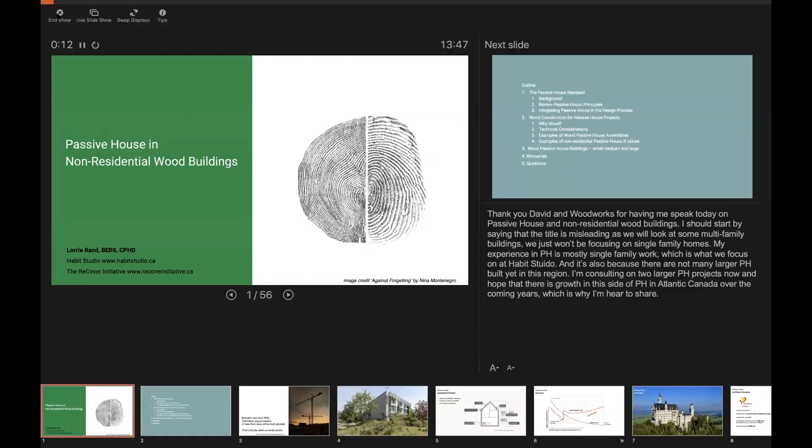Okay, so now I'll just go presenter view. And then I can see your presenter view here, not the... Oh okay, that's good we're practicing. That's so strange. Okay, so stop sharing.

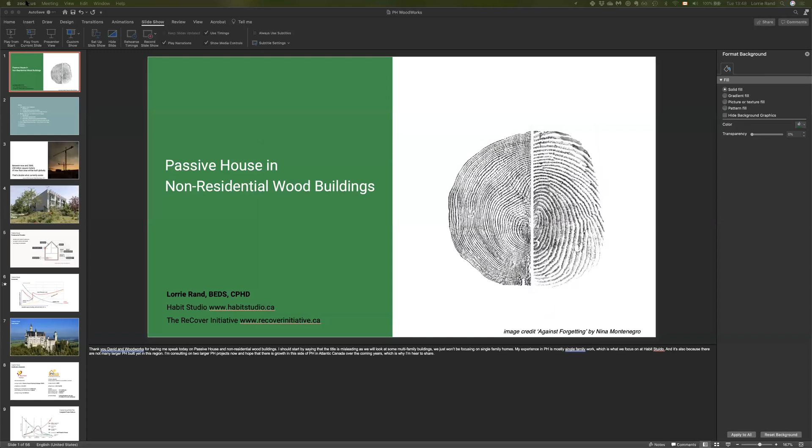There you go. Okay, not sure what that was. Must have hit the wrong thing. All right, yeah, that's perfect.

Great, now I have to confess I didn't practice the time, so there may be a part in the middle where I speed up a little. Ah, that's fine.

It's so hard, so much to cover. Well, there is a lot to cover. Like I was saying to my drafter this morning, it could easily be an all day thing.

Not that I would be prepared for that, but we'll just, if you go longer, cut the Q&A out. Sometimes there's no questions at the end, sometimes there is. It's hit or miss, really hard to prep for that.

Excuse me, bless you.

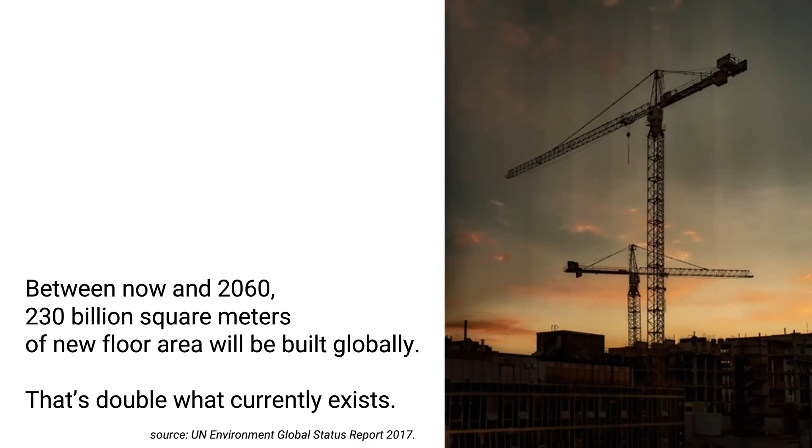I think it's our responsibility to make every building that we touch for the rest of our careers as sustainable as possible. That's where Passive House comes in, because Passive House buildings use up to 90% less energy than code compliant buildings. But while efficiency is what Passive House is predominantly known for, the Passive House standard is first and foremost a quality standard, and it promises unparalleled occupant comfort and minimal costs of building ownership over the life of the building, as well as the highest levels of energy efficiency achievable.

This is a picture of the first Passive House. Passive House started in the late 1980s when Wolfgang Feist, a German physicist, and Bo Adamson, a Swedish economist, set out to use building science and economics together to design the best building they could build. This project was built in 1991 and has been continuously monitored since then. A report was recently produced documenting 25 years of monitoring data, demonstrating that the house is still performing as modeled. I called it a house, but it's actually a 4-unit townhouse in Darmstadt, Germany.

In terms of energy use, the condition of the building components, the indoor air quality, and general quality of interior spaces, this building is still going strong with no noticeable deterioration in performance. So that can give us confidence. A lot of people in North America still haven't even heard of Passive House, but there's 25 years of proof that as an approach, it works.

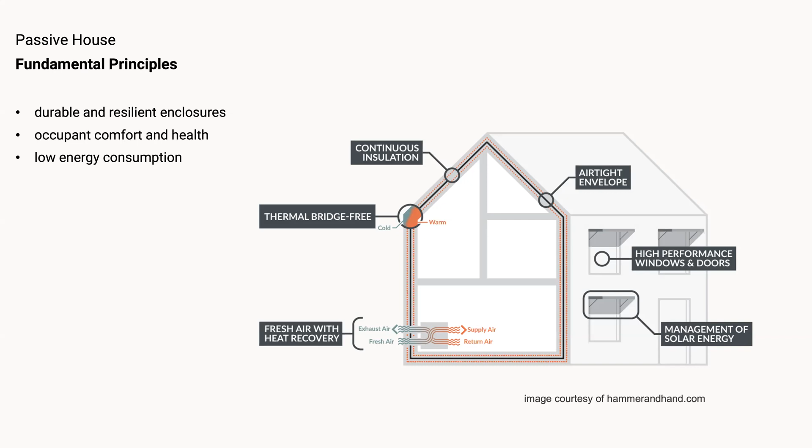If we stop short of optimal performance because we don't want to spend as much money, or perhaps we've modeled it incorrectly, we get the highest cost for slightly okay performance. It really helps to aim for that target. If we spend more than we need to and go beyond that, you've spent too much for your building. So that's where economics comes in, deeply linked in the energy modeling process, and it's where the targets that the Germans used when writing the PHPP, the energy modeling platform, came from.

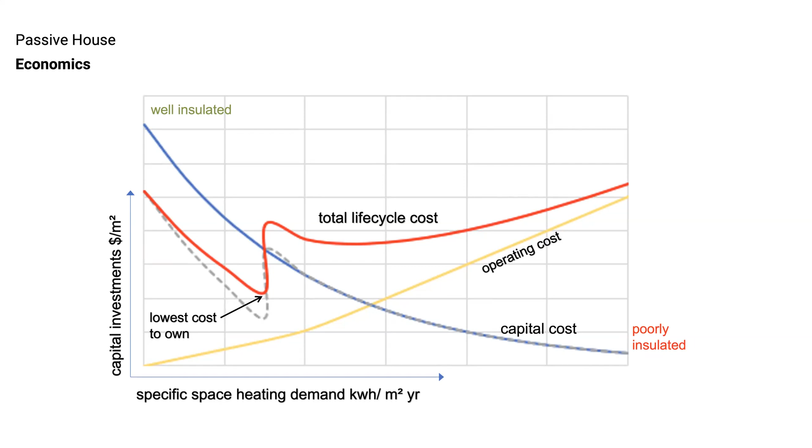One of the top 3 goals of the Passive House strategy is affordability. And what they're talking about isn't capital cost of the building, it's long-term affordability over the life of the building, which often represents less than 10% of the cost of building ownership. So this is profoundly important, and is useful in explaining to clients why spending slightly more for a high performance building is well worth the money.

So this is sort of like the secret 6th principle of Passive House.

Heat loss is a factor of the area of the envelope relative to the volume of air in the building, so we want to be very strategic with the shape. A simple shape with a smaller ratio of surface area to volume minimizes heat loss, and the reverse is true. This isn't to say we have to build cubes and shoe boxes, but it's something we need to be aware of, and something that's often forgotten or downplayed in importance in a project.

In North America, we have 2 options for designing, building, and pursuing certification on a Passive House.

Initially, the Passive House Institute began in Germany, and after some time the United States formed Passive House Institute United States. For quite some time they actually operated following the same Passive House targets as the Passive House Institute, but they eventually split, and it's quite confusing. I've tried to simplify it here because if you're working on a Passive House project and choosing to pursue certification, you need to consider which route you're going to take.

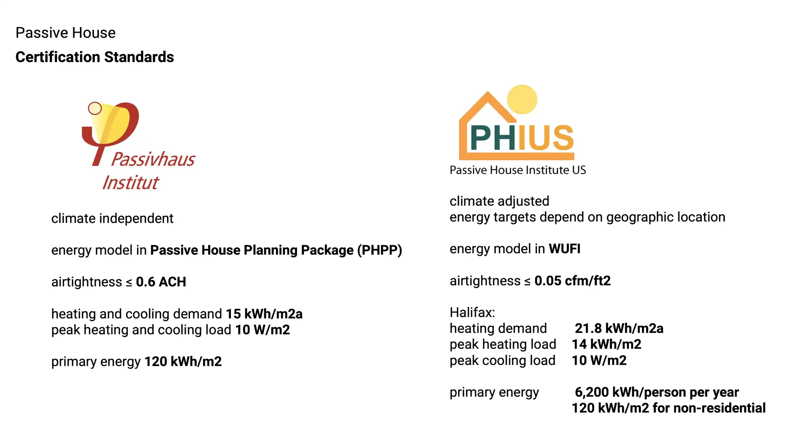It's super critical at the beginning of a project that the entire consultant team understand the performance targets and design objectives, and how their particular role is impacted by those targets. It's not impossible to make a passive house if you don't begin in pre-design or schematic design, but it will cost more money if it's introduced to the scope of work later in the process.

And so the other thing that happens if passive house is maybe not a firm commitment, or it's added later in the process, is that it gives the illusion of being an extra, because there would be a significant number of changes needed in order to make it work. So for that reason, it's strongly recommended that if you are considering making a passive house, it is part of the project right from the start.

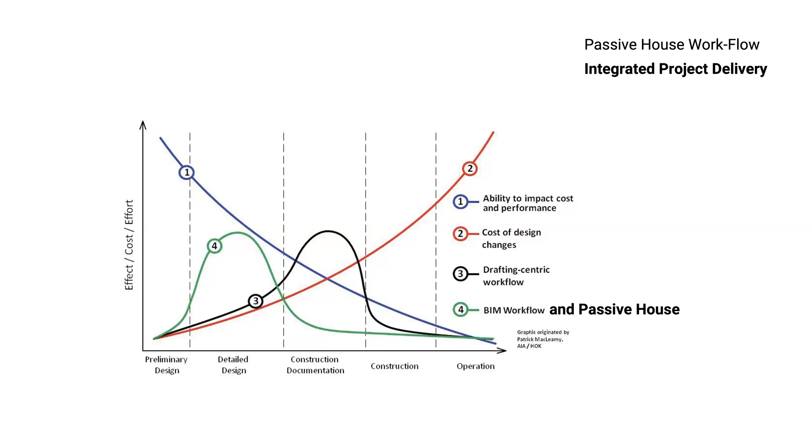So energy modeling is critical in a passive house project. Architects and engineers have a very complex job, and essentially the job is to solve problems, and the building is something that is needed to answer the problem. And there's a list of requirements and priorities that are subject to constraints, including cost and space and codes, and also the laws of physics.

The energy model will give information about the performance that will inform all of these decisions, and it's linked to costs and these other factors. A lot of the time we have to defend our recommendations for a building to a client, or sometimes to a code official, a building official. Having an energy model gives clear data to support your recommendation. It can give you a lot of confidence in advising your clients on how they can expect the building to perform, and then what it will cost them to own that building.

Having said that, you should never promise that the building will perform exactly as modeled, because occupant behavior has a huge role in the way that a building functions in terms of internal heat gains, and also the variations in weather patterns year to year can have a big difference. So it's based on a set of climate data for your specific location, and of course, one year may be slightly different than the next.

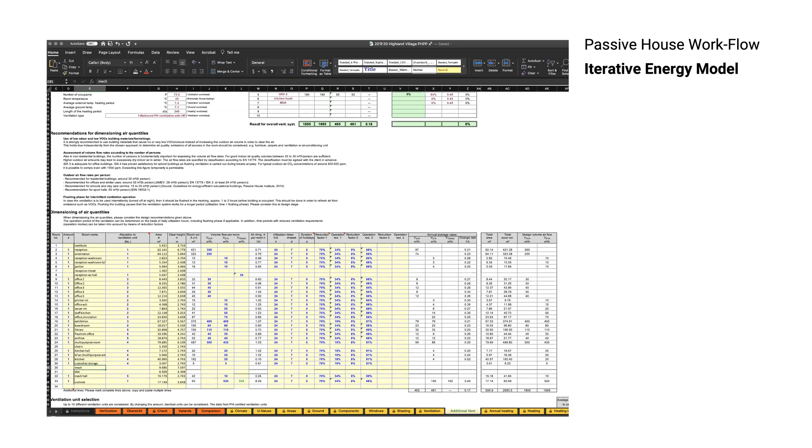So you don't have to certify your building. In fact, I've lost count of the passive house buildings we have done, and we've never certified a building. We're in the process of certification on our first project. The certification process is a rigorous third-party quality assurance process that definitely adds time to the project, so you need to budget for that time in your design fee, if that is considered in the project.

The certified passive house designer works with the design team, taking direction from the architect and the engineers, but also from the client and potentially the builders, to develop and maintain the energy model, and to advise on recommended design changes that might impact performance for the better. And then their role is also to produce a set of documentation that is sent to the passive house certifier, which would include things like building details, photographs documenting construction, and also site conditions, results of the blower door test, and commissioning of the mechanical systems. Every detail, they want to know everything about the building.

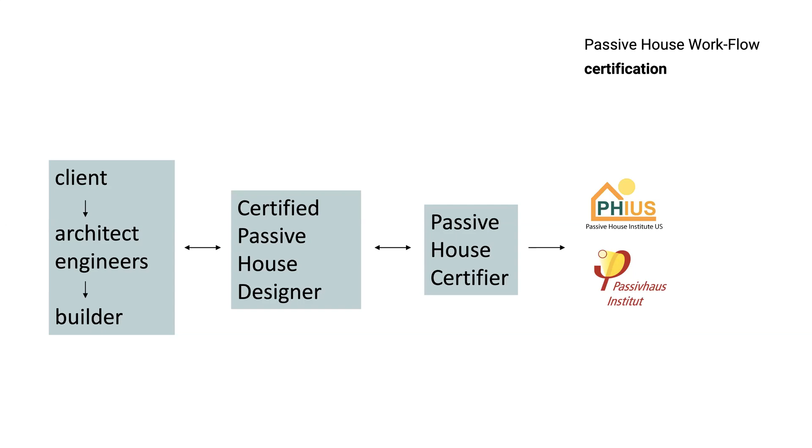So in construction, the most important thing is that the builder and the contractor team understands the objectives and that they have buy-in. Your team of builders needs to be motivated to meet the targets, and they need to be educated about the sorts of things that they might do that could negatively impact the work.

Execution is 50% of meeting the targets. So you can do a bang up job in design and still fail to hit the targets if the contracting team is slack.

So every trade that comes on site needs to understand that only planned penetrations can be made in the envelope, and that's usually the one single most important thing on a project.

As I said before, we need to do blower door tests to confirm that the air tightness targets have been met. Blower door tests on bigger buildings can be quite technically tricky, depending on the volume of air in the building, and in some cases the form of the building, if you have a shape with different wings, for example. So you might potentially need to set up multiple fan setups in multiple doors, and sometimes you may need to compartmentalize the building, sealing off different bits and testing them independently. The blower door test can take the better part of a day, if not longer, with a big building.

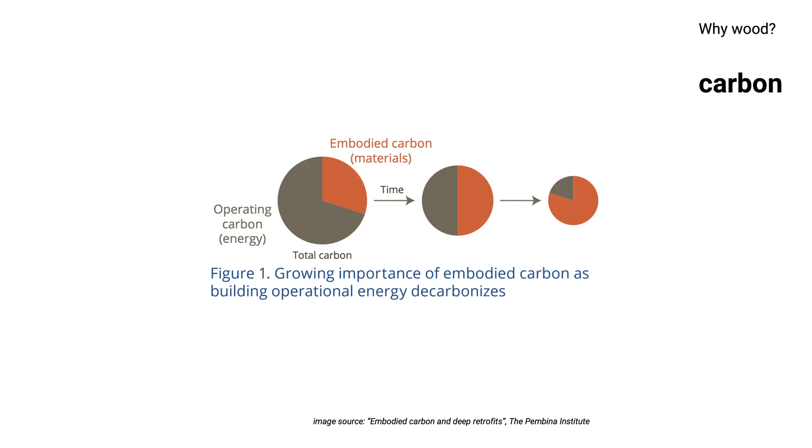Getting control of our emissions, the emissions that we produce between now and 2050, will determine whether or not we prevent the worst effects from climate change. Currently, operational emissions account for nearly 75% of building sector carbon emissions, and the balance comes from embodied carbon emitted in the fabrication of building materials and the construction process. And as grids decarbonize and building efficiency continues to improve, by 2050, embodied carbon will represent half of the greenhouse gas emissions from buildings. So this means that to meet our global climate goals, we must specify products with small carbon footprints.

I hesitated to include this graph because it's from FPInnovations, so it's a funded study by the wood industry. However, it was done with the Athena calculator, which is a good calculator, and that looks at the embodied energy of wood and steel across, not just the embodied energy in construction, but also water and air pollution and other factors.

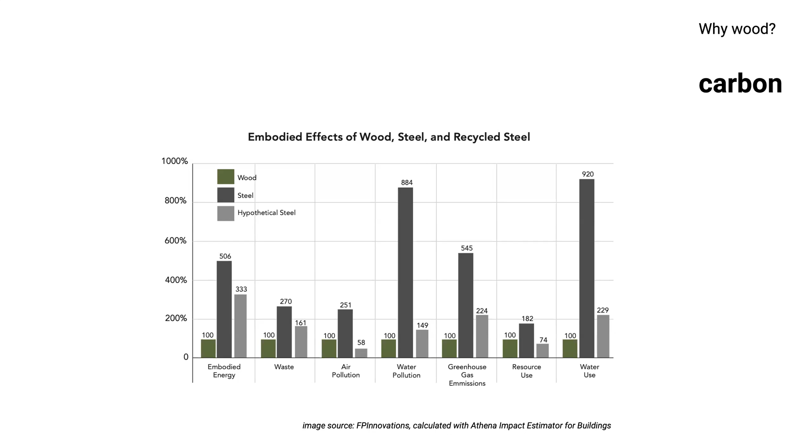I'm not going to go into what the assemblies are for those 4 buildings, but basically he looked at what assembly would give us the highest embodied carbon, what is the typical scenario, what gets built. He's in Ontario, so he was using code compliant Ontario building, and then the best version of conventional construction, and the best version of sinking the most carbon, the most beneficial carbon products in the building.

I could talk all day about this information, so I want to do it quickly, but still get at the essence of it. The important information for people designing passive house projects is that the best building and the worst building in his calculations are both passive houses. So a passive house that is made with materials with high embodied carbon is the worst building in the bunch. And a code compliant building made with plant-based materials is actually better for the planet by quite a bit than a passive house built with predominantly foam-based insulation and concrete.

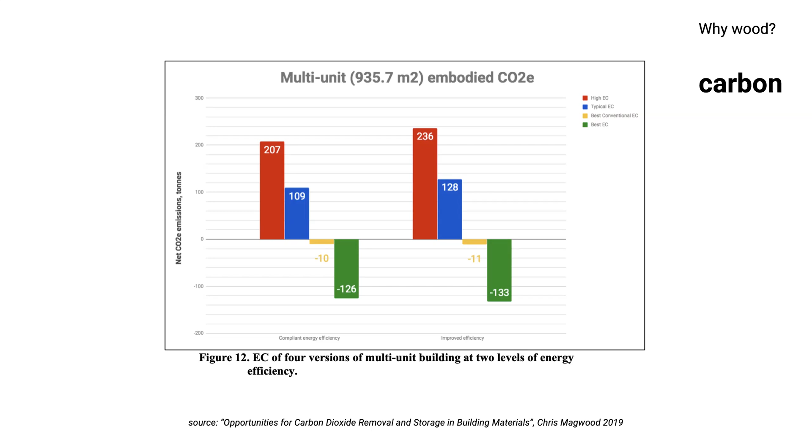And then if we look at those same numbers and factor in the operational carbon, because the excuse for using high embodied carbon products is always that they are going to save more energy than the damage they're doing in emissions during construction and fabrication, this proves that that is not the case.

So nothing really changed in this graph. He's assuming that these buildings are heated with a heat pump because that is how buildings typically are now in Ontario.

When I learned this, it really changed the way that I viewed the buildings, all of the buildings that we're building, but especially the passive house buildings, because it's an argument for sinking as much wood and other plant-based materials in the building.

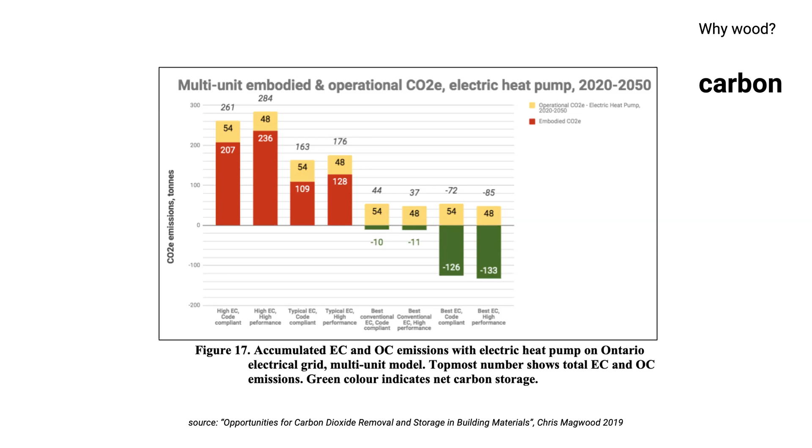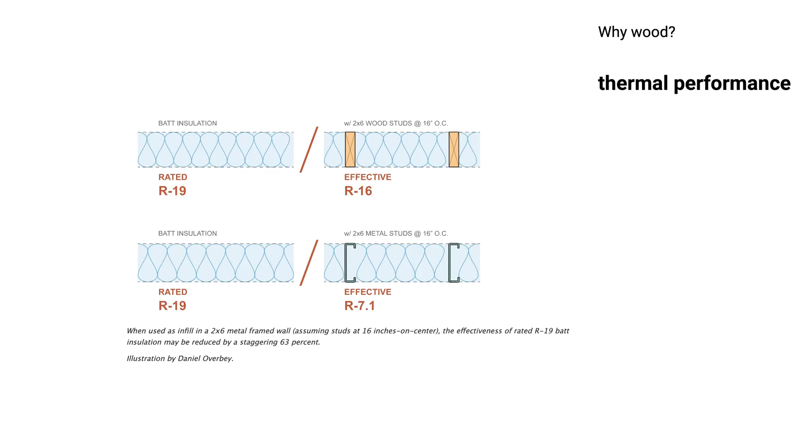In design school, I was taught that wood is great in compression and steel is great in tension, but wood and steel are actually both strong in compression and tension. Wood is lighter than concrete or steel, so it's easier to work with on site, and it has been shown to outperform steel seismically because it absorbs vibrations better and can take repeated stresses without failure in a better way than steel can.

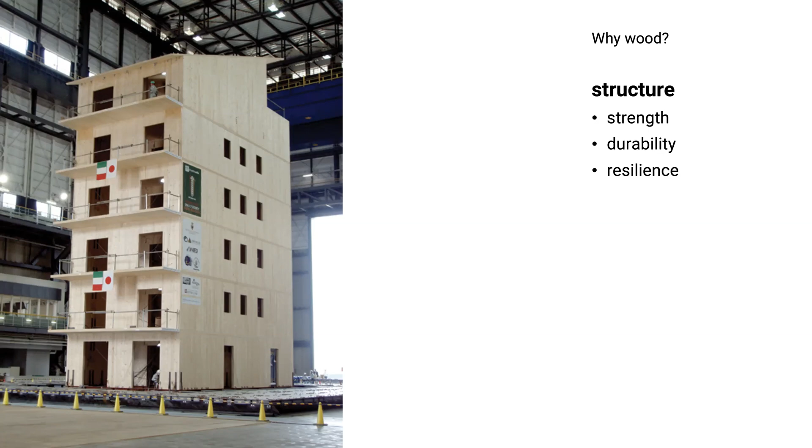And cost - the cost of a 2x4 this week, I looked it up yesterday, is 227% more than it was a year ago, and the cost of a sheet of OSB has gone up by nearly 300%. So this isn't the greatest timing for a presentation on the affordability of wood. But affordability is relative, and despite the current spike in wood, I would argue it's still an economical option.

The cost comparison of wood versus steel or masonry for a particular building is always going to vary depending on the details of the particular building. But research around the world is showing the comparative costs of wood - I'm talking now about large wood buildings versus steel or concrete-based buildings - across a variety of building types.

The costs associated with mass timber, as it becomes less experimental and more accepted by building codes, are anticipated to drop. One notable cost driver right now for mass timber is the relatively small supply. I just read that we have a new CLT fabrication place in Canada within the past month. As this becomes more available, and as more people become experienced in designing and building these buildings, the prices will come down.

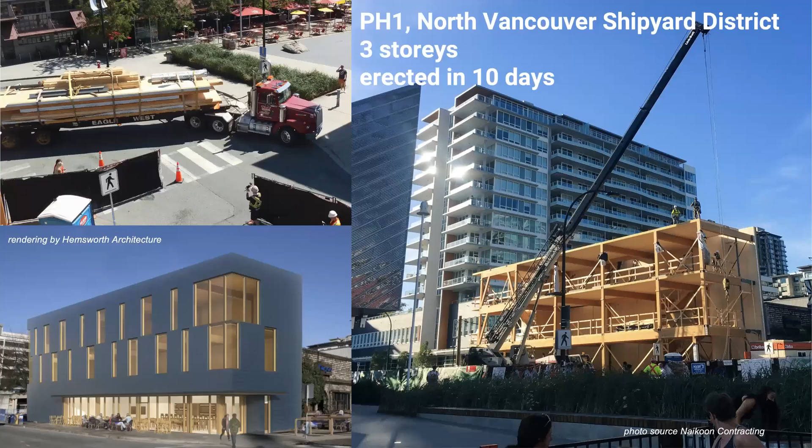And one of the reasons that the costs come down is because the costs of a project are not simply the costs of the materials.

So this is a passive house in North Vancouver. It's a 3-story building that was erected in 10 days. The reasons for choosing to build it as CLT, a panelized option, were because of a very tightly constrained site, so cost was less of a factor, and the weight was less of a factor. It was the fact that they could do it in such a short time that was a really driving factor in the decision to build this building.

I should say that modular and prefab passive house high rises can be done with steel and concrete, but there are different technical challenges with them because thermal bridging becomes more of a factor. As we know more and more about embodied carbon, more designers are going to choose to go in the direction of wood. Really, the operational carbon savings for a steel or concrete tower are never going to offset the embodied carbon from the construction.

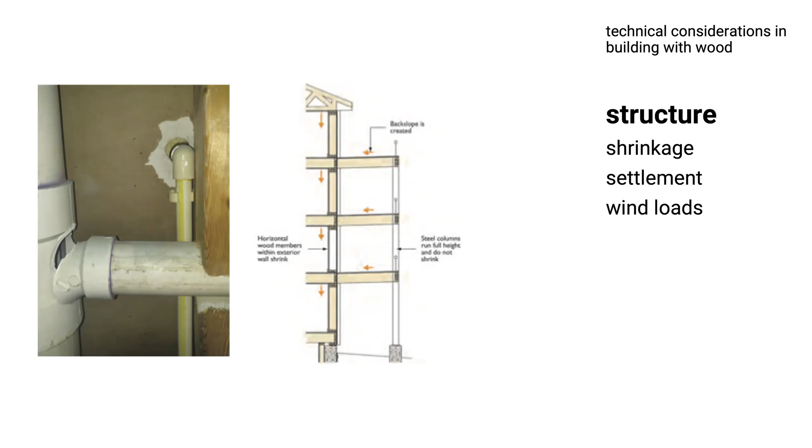And fire protection. So some of the slides I'm going to show you in a couple of minutes show examples of mass timber that has been left exposed in buildings. To my knowledge, this is always a negotiation with the building officials.

There are things you can do. Obviously, sprinkling a tall building is essential, and there are fire retarding treatments, but when you're going to expose wood, the details need to be carefully worked out. There's engineering involved. There's no cut and dry or prescriptive rules around this yet.

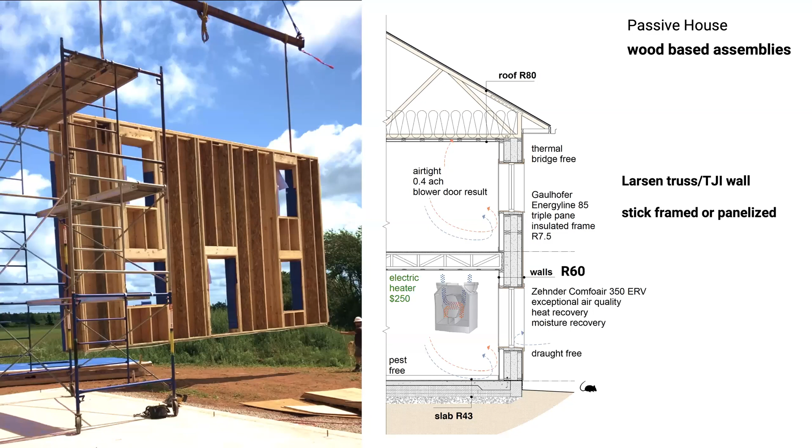Another really common option for similar applications would be the double stud wall with cavity insulation, again suitable for three to four stories max. The double stud wall is a very flexible option because if you need higher R-values, you can just make it deeper. However, it's a little bit less easy to accomplish the air sealing details at the material connections and also at things like windows and doors. So it relies on, you really need an experienced crew for this kind of wall.

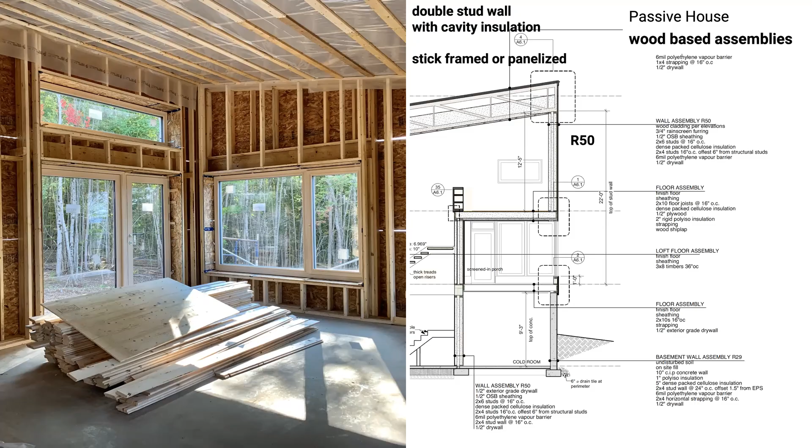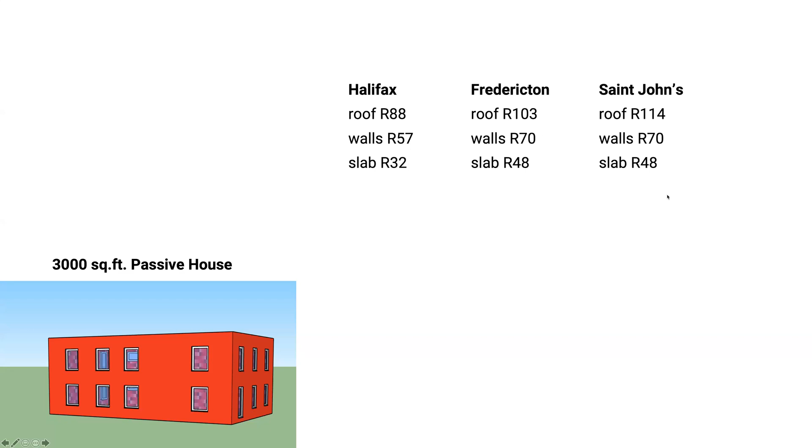But if you jump up in size to a 32,000 square foot passive house, your building in Halifax only needs an R40 roof, which is building code minimum, R30 walls, and an R23 slab. Similarly, slightly higher results in Fredericton and St. John's.

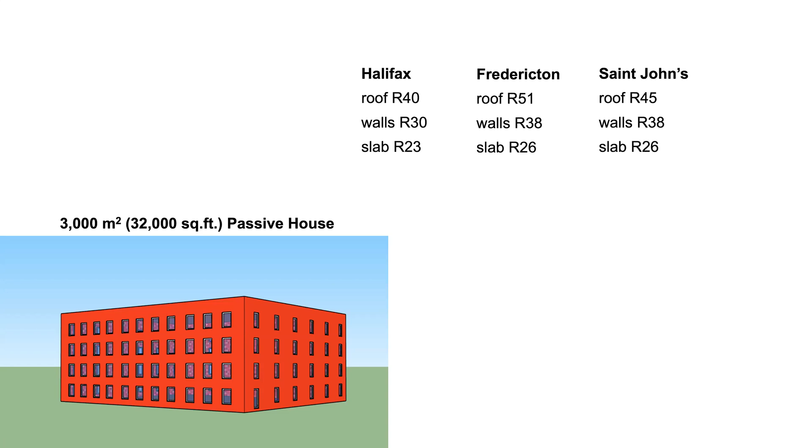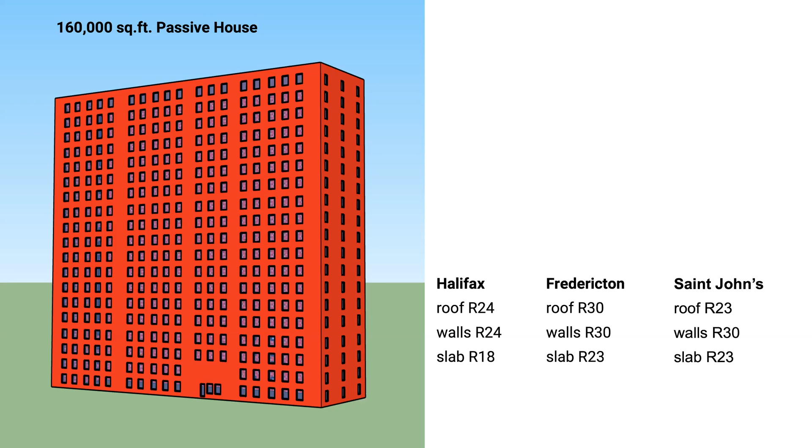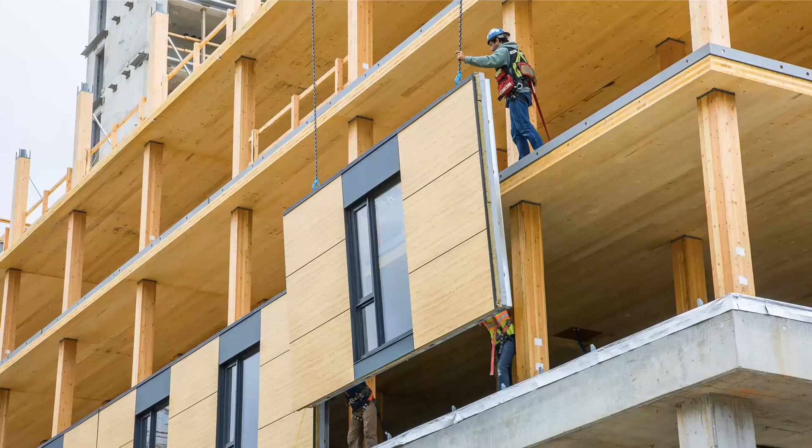I full-on thought it was a passive house until I wrote this presentation, so I cheated again, but I had to show you.

They did about 4 stories per 3 days. This building was the tallest wood building in the world until the previous building I showed you, Brock Commons, was built. Then BC and Norway kind of traded that title back and forth over the course of a couple of buildings.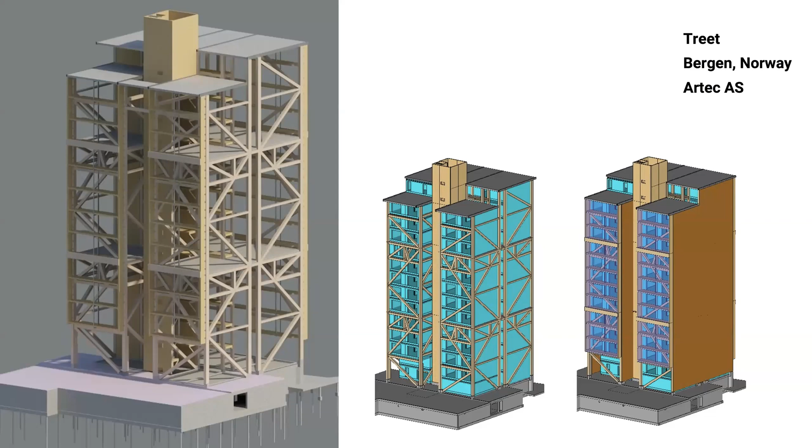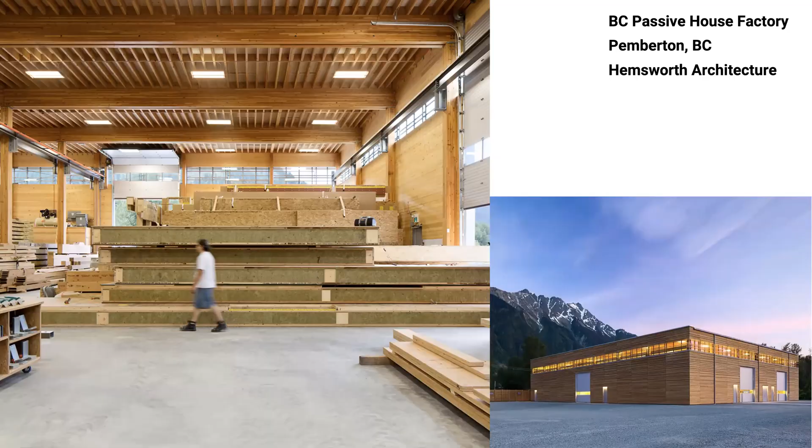I'm going to really quickly go through a handful of other ones. These are all certified passive house buildings of varying building types. This is the BC Passive House Factory in BC, and the Wood Innovation Research Lab at the University of Northern BC.

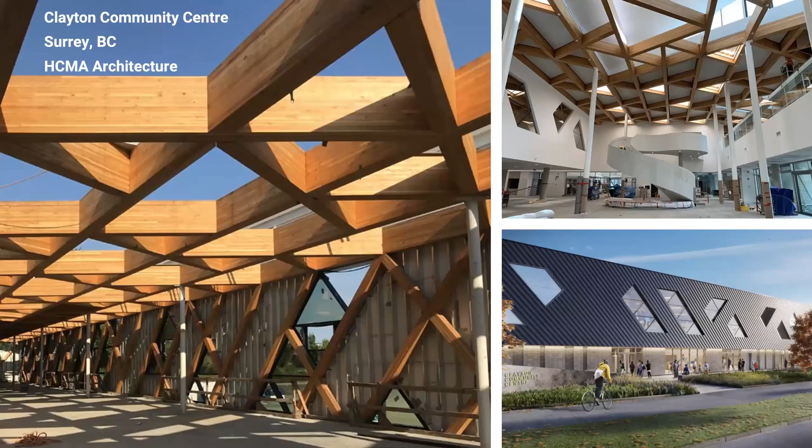And Clayton Community Center in Surrey, BC, which is all finished as I understand it, but the opening has been delayed due to COVID-19. It's a beautiful building. And a car dealership - there's lots of information on this project out on the internet if you're interested.

So we are at 3 o'clock, and I'm just wondering, David, what do you want me to do? Yeah, if you don't have many more slides, I think we could finish up there. But if you've got quite a bit, we'd end it there. I'll go through them quickly. Okay, these are slides - I obviously talked too slow at the beginning.

I wanted to go back to form factor because it's happening on one of the projects I'm working on now, where a very articulated building envelope is causing us some headaches. They're not insurmountable headaches, but it is something that I think was a surprise to the design team.

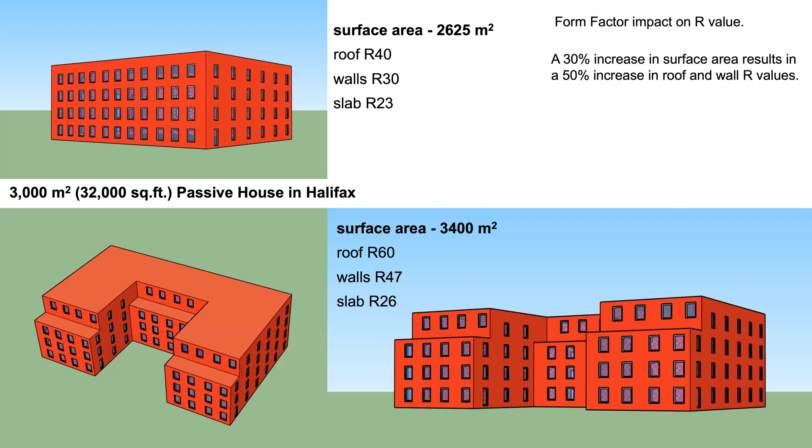That has a profound impact on the detailing and on the budget. And if we go to the ludicrous and increase the surface area again, it has an equally detrimental impact on the R values. This is not to say that we can't have interesting buildings, but it is something that as building designers we need to be aware of and to rationalize those decisions.

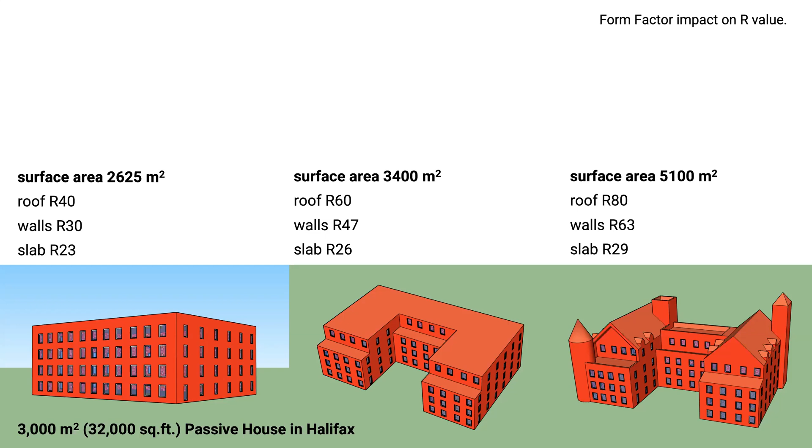So I am wrapping up with a building that I think did this well. This is a small commercial building, or a small non-residential building, but it's a house scale. It's only 2,100 square feet, and it's an example of a passive house with a way less than optimal form factor.

The form factor is one of the reasons why I'm sharing this building, but the other is because it has a very challenging technical program in terms of building science, in that it is variably occupied, used only seasonally for education purposes, and has a full-scale lab inside it. So it required quite complicated and complex energy model work to accurately reflect the loads in the building.